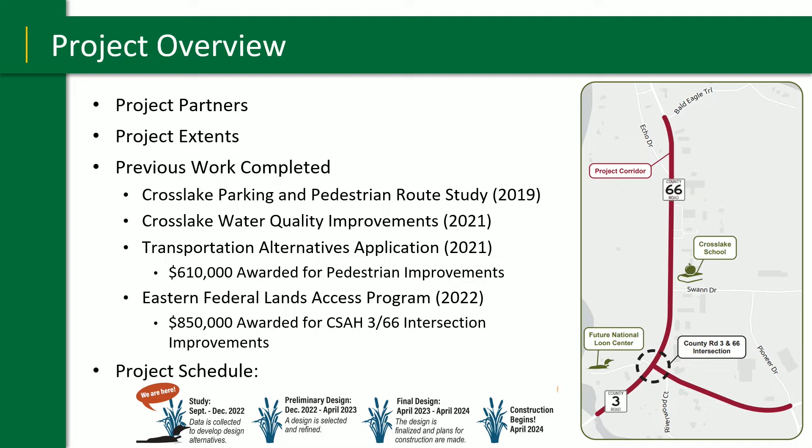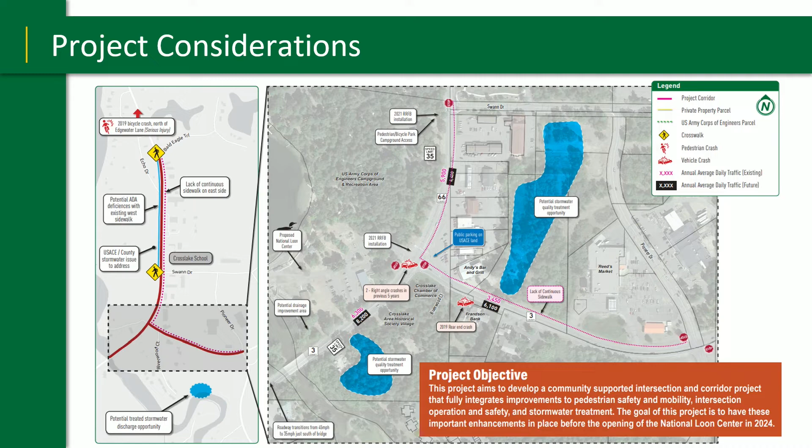I have a project considerations map back in the corner, happy to talk through it - I could talk a while on this but I won't. It shows the general project area from the bridge up to Bald Eagle Trail, the 3 and 66 intersection over to Pioneer Drive. It identifies some of the trail gaps - there isn't a trail or sidewalk currently along the east side of 66, so that's a potential improvement with this project. It also digs into some of the safety issues, the crashes that have occurred at the intersection, and other project elements, which we'll get into as we move forward.

So the overall goals and objectives for the project - I'll read this quickly. The objective is to develop a community-supported alternative that fully integrates improvements to pedestrian safety and mobility, intersection operation and safety, and stormwater treatment. The goal is to have all of this completed in conjunction with the opening of the NLC in 2024. That includes safety improvements to the 3 and 66 intersection, pedestrian improvements along County Road 3 to Pioneer Drive and along 66 to Bald Eagle Trail, and stormwater treatment improvements.

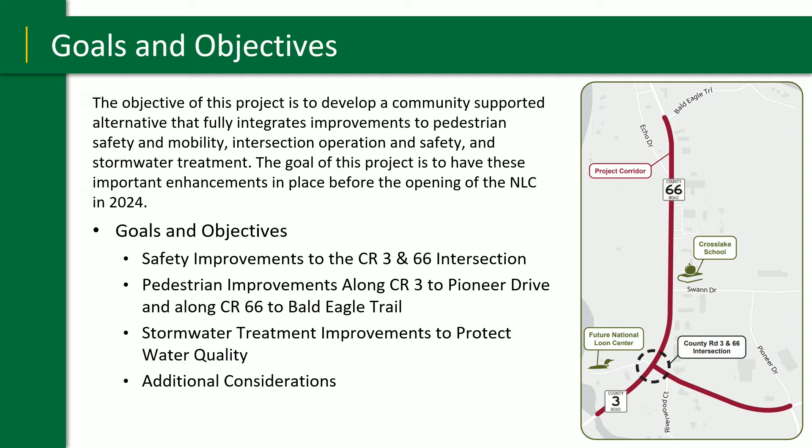Some additional considerations we need to be cognizant of, and something we'll dig into, is construction staging. We fully understand that the County Road 66 improvement had a full closure this past summer, and we will be digging into staging and traffic control at this intersection as a recommendation is selected and carried forward. The 3 and 66 intersection does provide more opportunities for local detour routes, business access signage, and construction staging to avoid the full closure and impact felt this year. That's something that will be considered as we move forward with whatever option is selected and carried forward.

From an existing conditions perspective, you've all driven through the intersection many times, but the current speed limit on the road is 35 miles per hour. Just south of the intersection it's 45 miles per hour where it transitions near the bridge. It's a suburban, urban type section with curb and gutter, a bit more close feel with businesses and trees on each side. But south of the bridge area, it is rural. So the intersection serves as a transition area between the high-speed rural section south of the corridor and the urban lower speed section - kind of that precipice between urban and rural.

Currently there is a marked pedestrian crossing on the north and east legs, and an RRFB - that flashing beacon, pedestrian activated device - is installed across the north leg to provide notification of pedestrians crossing at the intersection. As you all know, it's side street stop control today, so the County Road 3 approach westbound needs to stop, and the eastbound from the campsite as well.

Moving into our intersection control evaluation, we wanted to really dig in and understand the existing conditions before providing recommendations. So we did data collection and were able to find data from a 2019 school study that was completed - this gives us our baseline.

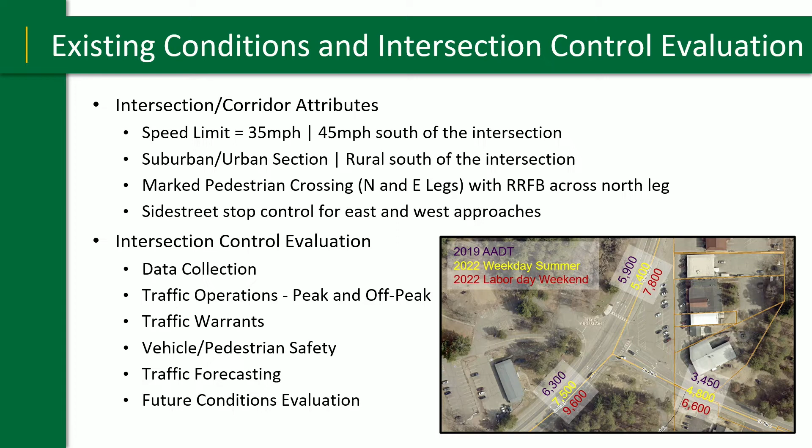So I wanted to talk through the alternatives that we walked through. Starting first with the do-nothing or the side street stop control option, what we see is this does not meet the project goals.

I wanted to hit on the introduction of the National Loon Center opening in 2024. The exact traffic volumes it will generate are unknown, but it will add vehicles and pedestrian traffic to the area, since parking won't necessarily be provided on site. There will be a lot more pedestrians walking through the intersection, so one key driver is creating a safe environment for pedestrians and vehicles, primarily pedestrians, to get across the intersection.

The reason we found this doesn't meet project goals is because there's significant support to make long-lasting improvements that emphasize pedestrian safety while meeting community needs today and into the future. While existing facilities function today, there are concerns about how they'd function with that added pedestrian traffic crossing that movement.

The all-way stop was also identified as not meeting project goals, again for the same reason—significant support for long-lasting improvements. Additional alternatives like a signal or a roundabout have higher capacity to accommodate fluctuations in traffic and do a better job of accommodating safe pedestrian movements.

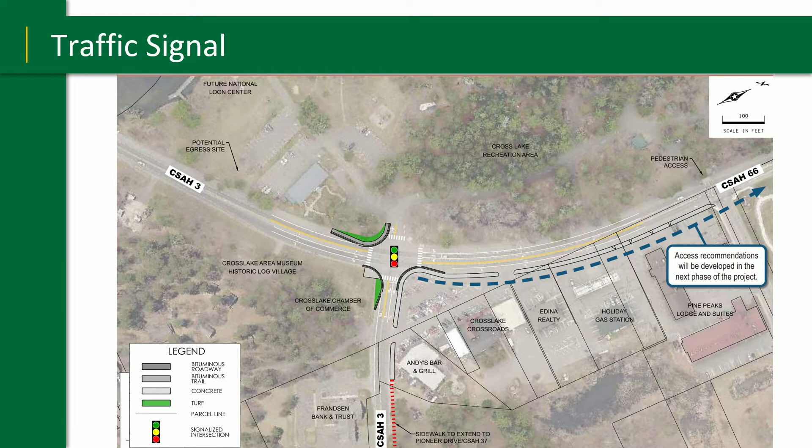So with this one, the previous design speed of that through movement was 36, 37, whatever people want to drive. The design speed of a roundabout is 20 to 25 miles per hour. So it really does a nice job of slowing people down. As we talk about being a checkpoint or a transition point between the rural and the suburban, urban area, it would do a very nice job of having people enter into town and slow down before they get into that main drag of Crosslake and traveling through there.

The roundabout would still have significant capacity to accommodate any additional pedestrian movements through the intersection, as well as any additional traffic generated by the opening of NLC. So it has nice capacity to handle that.

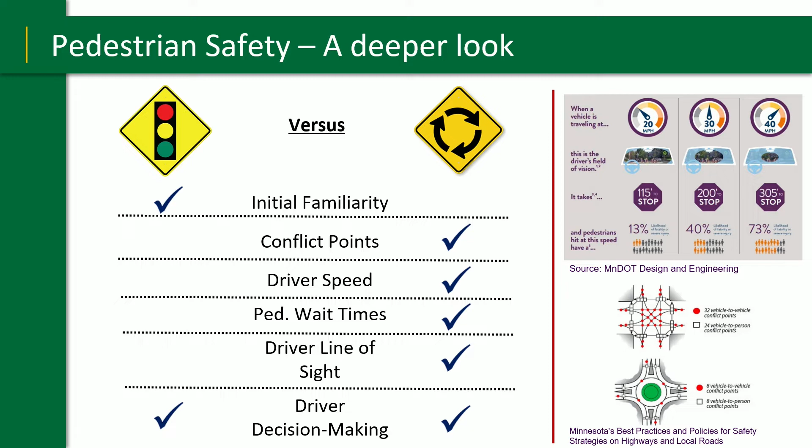So just getting into the next steps in public engagement. Check out the project website. I know Tim mentioned the input ID and being able to provide comments there. Sign up for mailing lists if you provide your contact information as part of either the comments or the sign-in sheet, and you can get added to that. And then talk to the folks around the room. Happy to hear and have discussions on whatever your thoughts are on the recommendation or really anything with the intersection.

So our next steps, as I mentioned, we are still in the study phase, just getting through that initial analysis, and wanted to have a conversation with the public here before proceeding into design.

So I don't know, Tim, if you have anything else or anything I missed? Well, I could answer a bunch of questions, but I don't know. That was quick, so yeah, happy to.

I don't know if you mentioned this, but this is one of at least two public meetings like this, maybe even another one, we'll see how it goes, to show. These are just concepts right now, there's a lot of tweaking to do on anything. Come up with something, show that to you. I just want it all to be clear, that your recommendation based on the traffic analysis is a roundabout.

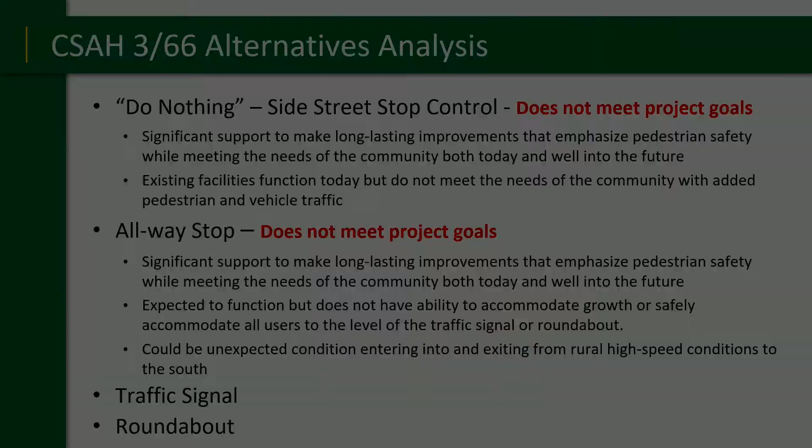Attention, it really comes down to pedestrian safety. Oh, I'm sorry, I'm sorry. For those online that couldn't hear me, one of the things that was talked about was pedestrian safety.

I think what you heard Jake say is that all of these alternatives could work. But we're concerned about the pedestrians that are already there, and then that, I can touch on that in a second.

In the roundabouts, and it's almost counterintuitive, and it was to me after I read a lot of statistics and literature on roundabouts and pedestrian safety, is that roundabouts are actually safer for pedestrians than signals by 40%. By 40%. That surprised me.

It's counterintuitive because we stop for pedestrians, right? But in roundabouts, we encourage people to keep going. It's counterintuitive, I would agree. When I was reading the statistics on it, it's actually safer statistically for pedestrians to only cross one lane of traffic at a time, and for drivers to pay attention to less things than at a signal. I was surprised by it too.

This right here is pedestrian way, and this pedestrian way, and this is the trail will continue on. And we're proposing a sidewalk up that way, and I'll just mention too, this is a concept design, and it would be easy, so on that south leg, to extend that sidewalk, to provide a slip ramp for bikers to come off the shoulder and onto the pedestrian facilities. This is still a concept, so those elements could be added.

Was that they're encouraged to use the roundabout as a car would. And I know a lot of hardcore bikers do that and prefer that. So it depends on how you use your bike.

Next question. It's my turn.

I think you can see the opposition to what you presented to everyone in the audience here. I think your solutions are real short-sighted, maybe good for 10 years. You gotta go back to the drawing board and come up with solutions for the real future, to make sure it's not gonna make negative impacts. You don't even know if the Loon Center is gonna succeed. It might be gone in 2 years if nobody appreciates it. Then what do you do?

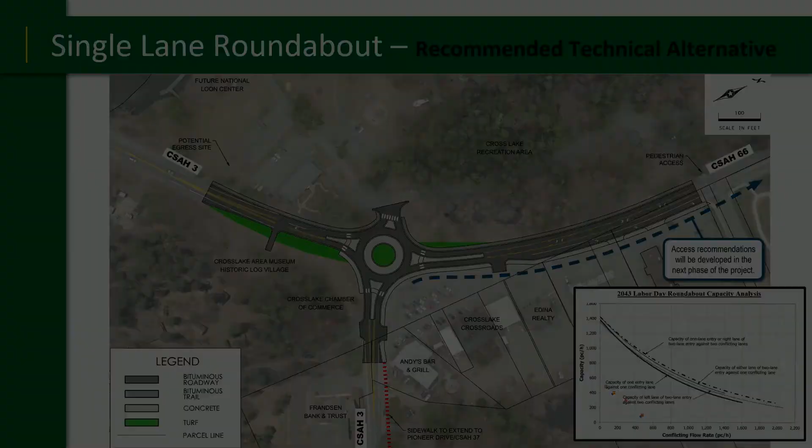I'm sorry, you got 66 here. That's County Road 3, 66 starts here. You can't even make a back break. We've got 24 families down there in Riverwood, if you're going to block off only one way out of there.

From the concept that was shown early on, we know there's 24 families down there, because unless you live there, there's no reason to come.

But you made this map backwards. How do we know the rest of it isn't going to be backwards? Yeah, I apologize, is that wrong? No, we saw that on the boards and we changed it in the presentation. Oh, okay, it's not right there. Okay, got it, because it's right there, it's right on that one.

Right here, please. My question is, you mentioned the input that the Crosslake City Council would have as far as making the ultimate decision. What are the other main factors and proponents involved in that situation, like the county? Who else would provide input to help make that decision, and what kind of weight would they have?